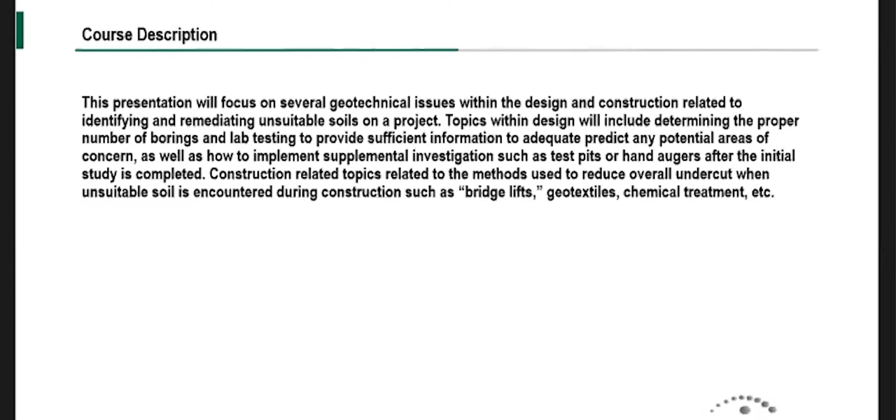The takeaways we'd like are to understand how the location and number of borings are determined in a study, how conducting additional site investigation techniques can reduce risk in soil remediation during construction, learn the causes of unsuitable subgrades and soils, how you can identify them, and how you can remedy them during construction. And then develop enough understanding so you can ask questions.

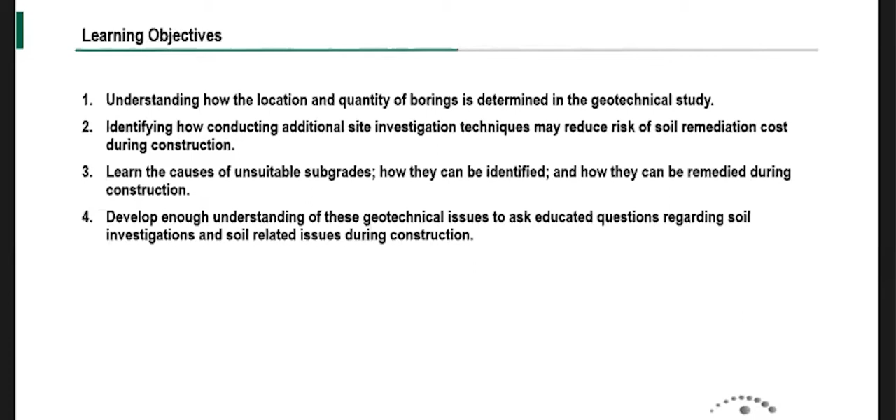That's the biggest thing - you're not going to walk away from this being an expert, but you will get some takeaways that hopefully, in the future, will trigger a memory of something you heard in this presentation, and you can ask a question that causes them to provide more information or an alternative.

So what's in a report? We talk about the subsurface exploration, the laboratory results, any analysis that's done, recommendations based on those analyses, and then the construction considerations. I always point to construction considerations and the geotechnical recommendations. The recommendations are basically based on what we've seen in the field - this is what we recommend, foundation-wise, retaining wall-wise, or pavement section-wise.

But the considerations take the recommendations a step further - these are items that may come up during construction that are probably going to cost the owner money, whether it's dewatering, unsuitable soils, the presence of rock higher than a bearing grade or excavation grade, things of that nature. Are you going to have issues environmentally? Is there a big trash pit on the site?

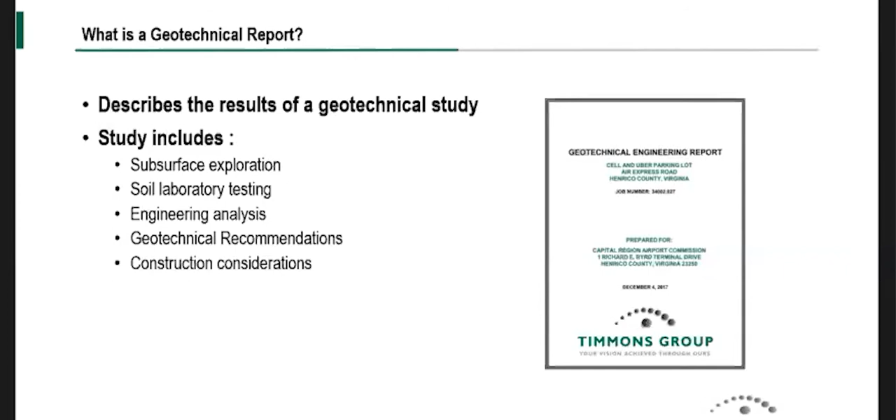So the subsurface exploration - basically we come in and get samples, and we'll get test borings done, sometimes test pits, and in some cases we'll do further testing with pressuremeter, CPT, DMT, depending on the type of foundations we think are going to be on a project. This helps us establish the properties of the soil. What we provide, I'll show you later, is basically like a graph, showing fill here, this type of soil here, this type of soil here, and that's where we draw our geotechnical recommendations from.

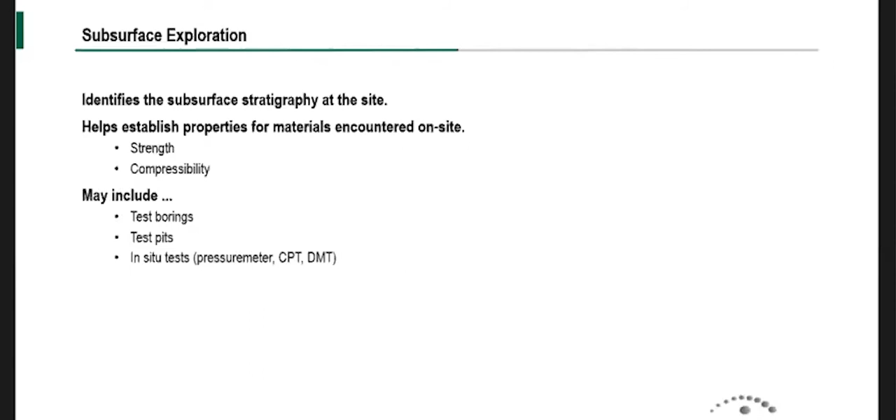So how we attain our borings in the soil samples is with the standard penetration test. This right here is either 18 inches or 2 feet long, and it's only 2 inches in inside diameter. So if we put 10 holes on a site, we're only getting 2 inches of soil sample within each one of those holes.

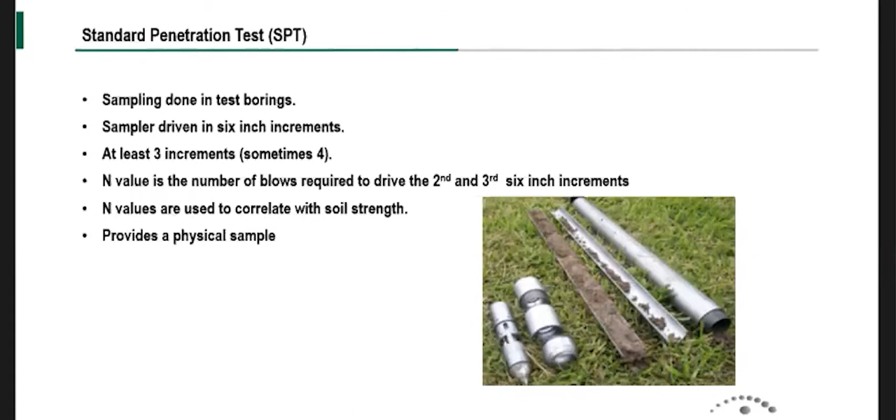So if your site is 100 by 100, you're really still not getting that much information from the samples. There can be a lot of variability, but this actual test is where we get our N values from, and we use the N values to correlate soil strength. And then we take the soil that's inside of the spoon and put it in jars, and that's where we get our samples from.

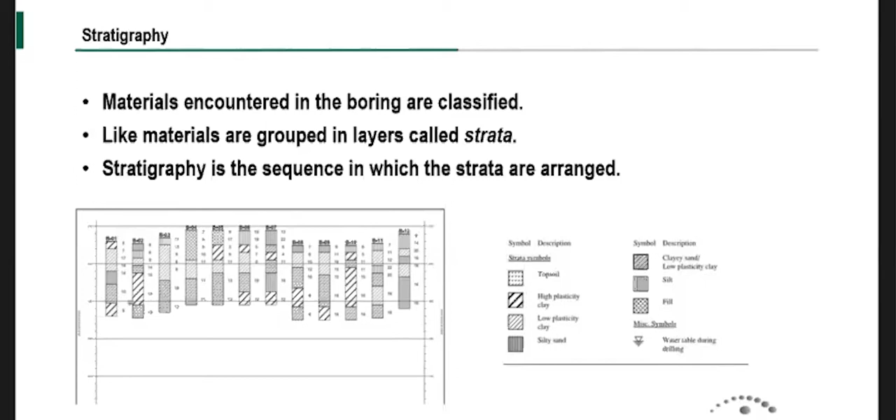The results of the test boring in the field are presented on a test boring log. There we classify the material and provide any lab data pertinent to that material. We list the depth and elevation where the materials are encountered. It also has their stratigraphy on there, the results of the SPT test, which is the N value associated with each type of material, and groundwater observation. So at 10 feet, you may see a little indicator saying groundwater was observed at 10 feet.

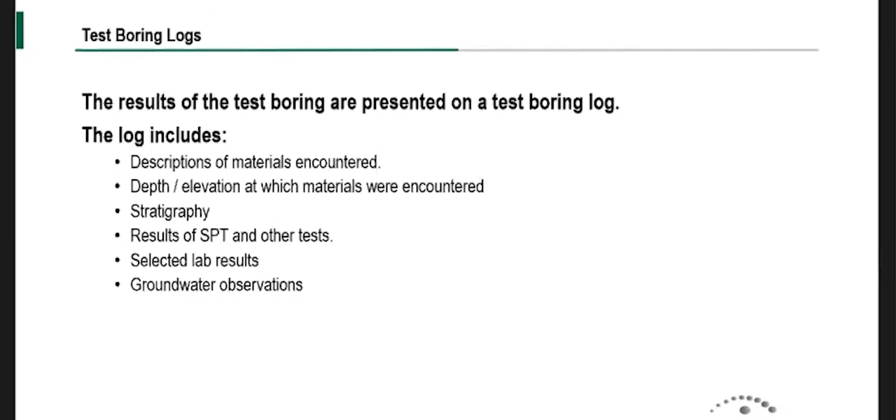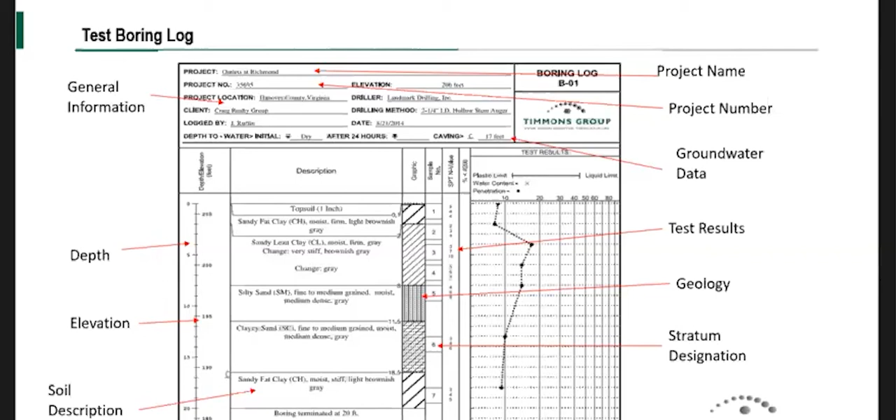You got the depth and elevation listed. The N values are right here, listed here. And then this is the test results, the liquid limit and plastic limit that we observed in the lab. And up here, we'll list any groundwater observations and anything like if it caves, which is pretty common.

So laboratory testing. Typical laboratory tests from boring: moisture content, gradation analysis, Atterberg limits. These are the things that we use to classify the soil that we get from the SPT test. Other tests that we perform: we'll get a bulk sample from the top 5 feet, and we can run a Proctor or CBR from that as well. But these are the bread and butter - these tests right here provide the bulk of the information for our engineering analysis and geotechnical recommendations later on.

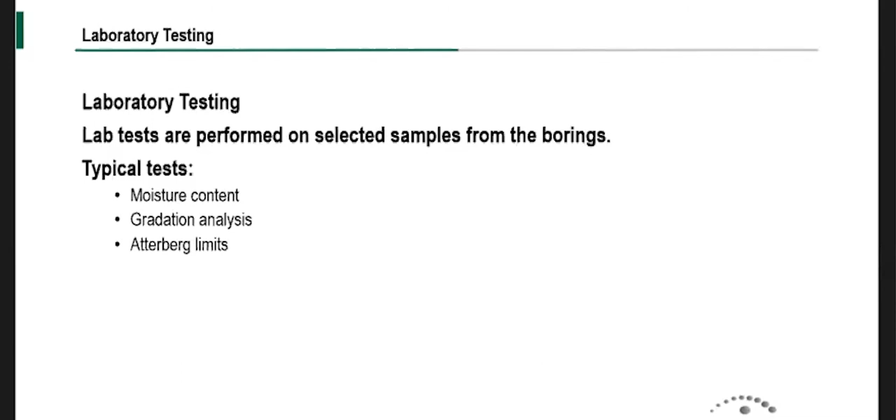So the components: the introduction, data collection and analysis. The introduction is what we understand the project to be. Data collection and analysis is how we approach the site, what we did on site to collect data, and what we plan on doing. The recommendation is based on the lab results and everything we get back, and that'll be where foundation recommendations are made, retaining wall, pavement.

Construction considerations are already discussed - these items are basically what's going to cost you money during construction. The limitations, we'll set limitations - we didn't drill this because of this, or we didn't do any environmental testing, that type of thing. And then the appendices is just where we put all the lab data and boring log, location plan, all that stuff goes in the appendix.

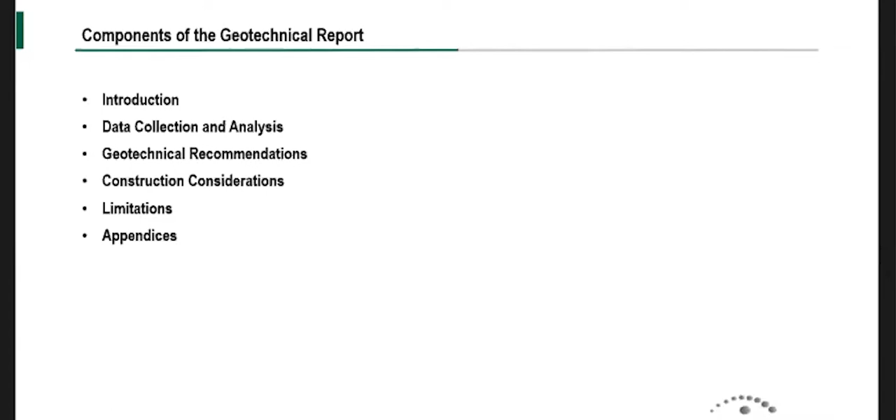So the introduction - to me, the biggest thing is, and I've seen this happen in industry, where this first section you're telling the owner, the architect, the designers that you understand what the project is and what they plan on doing on the site. So you may say it's a 5-acre site, the building will be in the northwest corner, it'll have a 90-space parking lot with an underground detention system within the parking lot.

And there's going to be a dumpster pad to the northwest and a new access road to the south. If you list all those things, then that's what you think the project is, and it's really a school addition, then did you do a bad job copy and pasting, or are you providing information for the wrong job? It doesn't happen that often, and normally it's just some copy and paste error, but when reviewing geotechnical reports from others, I have seen where they're talking about retail space, and it was for a community center. So obviously those are two separate things, and that needs to be clarified before you can really take anything further in the report at face value.

So the data collection: we described all the strata encountered, existing fill, the different fine and coarse grain soils, what their geological origins are, what the properties associated with those different strata are, whether this strata is probable for shrink swell, or an existing fill strata that has a lot of organics that may need to be removed or may decompose over time and be an issue. And also, where we observe groundwater and what impact that has on the project.

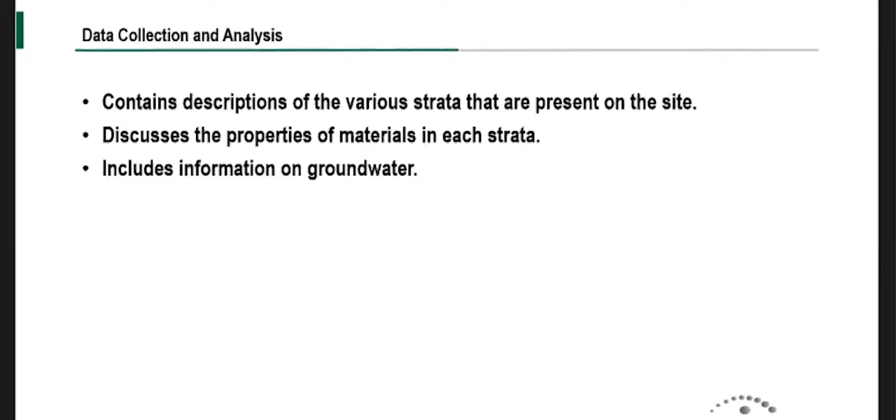The recommendations. So we've gone out to the site, we've drilled it, we've run all the labs, we've got our results back. Now it's time to provide the recommendations.

We're going to, in this section, talk about any recommendations for earthwork. A typical recommendation that all geotechnical engineers make, and it's not always followed, is all earthwork should be performed in the drier months. That doesn't always happen, depending on funding or timing or permitting or whatever. Project starts where it starts, but sometimes because this doesn't happen, the owner ends up paying more to get the earthwork done on a project, just because you're dealing with rain or cold weather or whatever.

We'll recommend a foundation type, whether it's shallow spread footings or some kind of deep foundation like piles or drilled shafts. Any below grade retaining walls for basements, and any pavement recommendations that are required will go in our recommendations section.

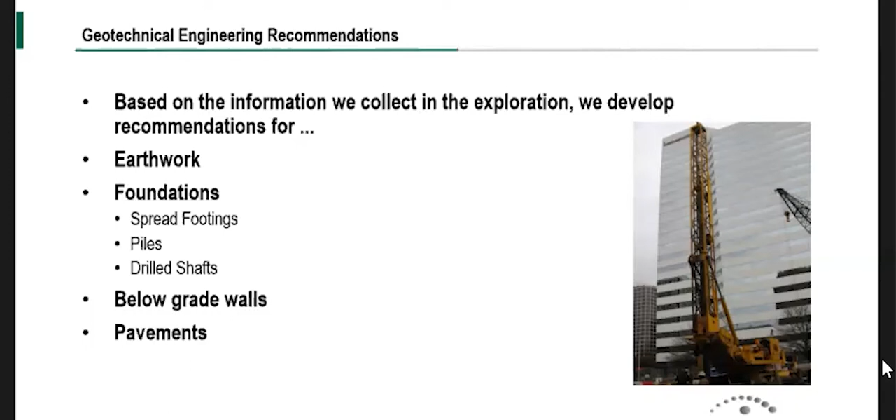So earthwork recommendations - this is where we talk about what needs to be done to prep the site for earthwork. How much topsoil we observed. What if there's a compacted fill that needs to be imported or excavated and placed on site. What the suitable materials are for that, how thick those materials shall be placed, and then any compaction requirements that are associated with the testing of the fill.

And then a moisture content requirement. Some projects have a very strict range. A lot of times you just see where you want the material to be able to achieve compaction. So you have a certain window based on the Proctor value that the moisture content needs to be.

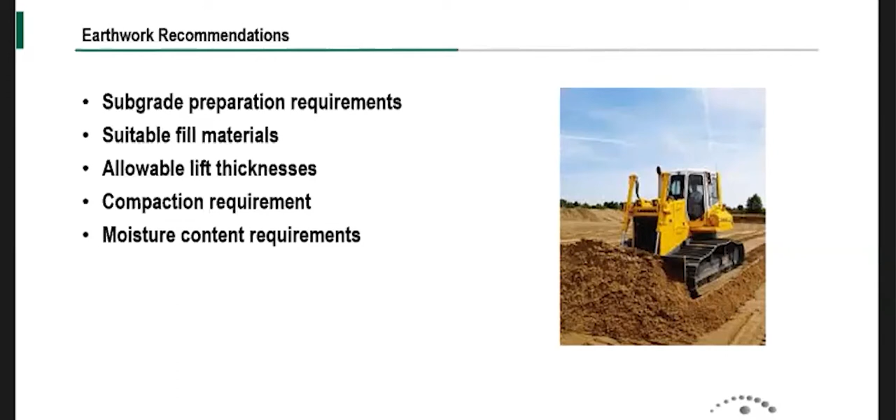Some of those soils may not be suitable. So in this section, we'll say the footing subgrades in the eastern portion of the building pad will be bearing on a high plastic material, and they need to be lowered an additional 2 feet. And that kind of goes into the next thing, which is the frost depth for the area. All footings should be below the frost depth.

And then any shrink swell issues that come from that - the change in moisture of the soil over time can destroy the concrete, and then everything settles. In this section, we'll talk about the expected differential settlement across the site based on the type of materials we observed, the lab testing results, and what the anticipated bearing strata will be for those foundations.

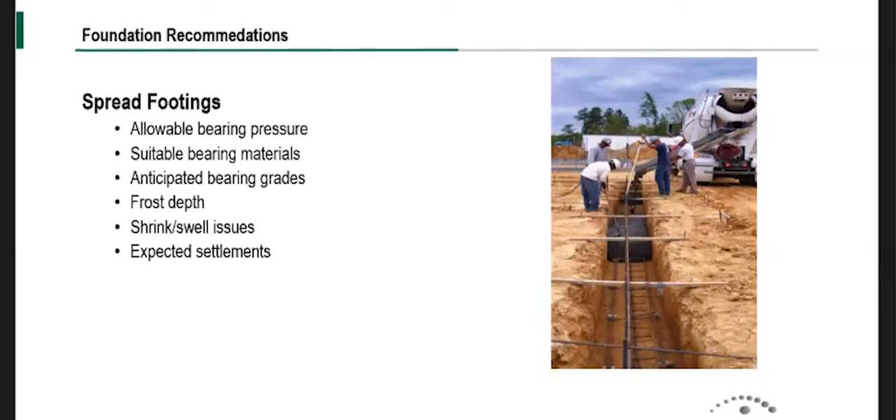If the spread footings are a no-go and we need to go to driven piles, we'll recommend a pile type and size. We'll also discuss the allowable capacity and what we anticipate the tip grades to be based on our data.

Any issues with installation - there may be a site with a bunch of existing fill, and you know that it's 10 feet of existing fill and you had trouble getting your borings done through that level. So you know there could be some issues with that. And depending on the type of pile you're driving, obstructions can be a huge hindrance to getting the pile installed properly. So you may say, we recommend that the contractor pre-drill all holes at pile locations to a depth of 10 feet below subgrade. That way you're just augering through what you think the junk is.

Any testing requirements - all piles have to be tested for their capacity, what the anticipated capacity is calculated to be. The most common method for that is dynamic pile testing, which is PDA. It's more widely accepted now. It used to be an either/or type thing - it was a big deal to recommend PDA testing in the geotech report. It's pretty much commonplace now.

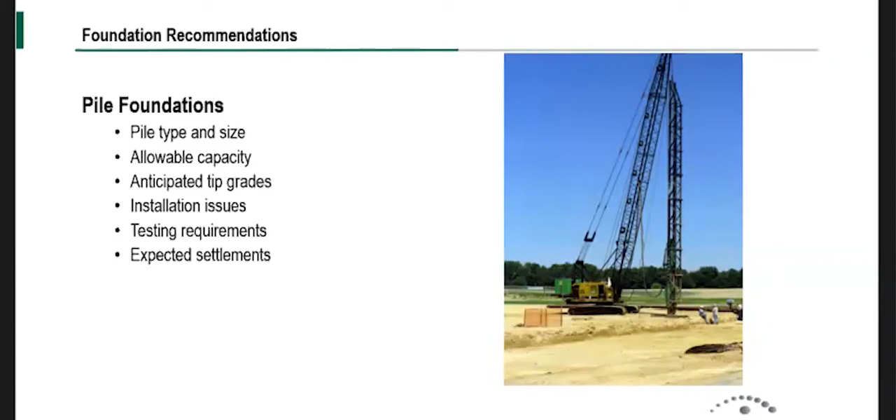And then once again, any expected settlements - just because you're putting a building or parking garage or something on piles, you're still going to have differential settlement across the site. Drill shafts are the same way.

The type and the size, what the anticipated bearing material is, whether it's a type of soil, we're looking for maybe a particular geologic formation to bear these in, or we're going to rock, and we'll discuss what competent rock is here.

The bearing pressures associated with those bearing materials, and any shaft friction. Some piles have friction in the calculation, so we'll talk about that. And then once again, the bearing grades, where we're thinking it's going to be, and any installation issues.

With drill shafts, groundwater can be a huge problem. If you observe groundwater pretty high, the installer is going to anticipate the use of a slurry mix or something to get the concrete in for the drill shaft. That's an additional cost. If that's mentioned ahead of time, it would be included in their bid price.

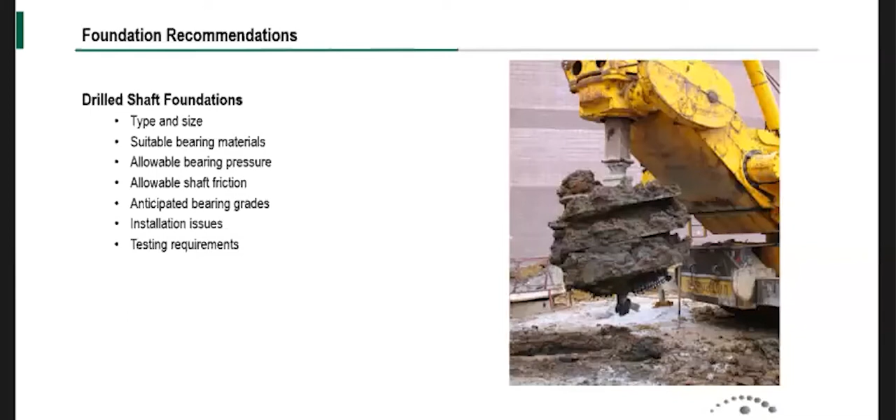If it's neglected during the geotech report, or the designer does not pick up on it, then it may not be a requirement in the bid package, and then they'll come back and say, hey, this is additional work, we need more money.

Like I said, construction considerations. So we've got all this stuff that we've analyzed and reported on, and the information is, this is what we think you need to do to properly support everything that's going on the site. However, your site has X, Y, and Z, and you need to take these things into consideration so that you can do what you're planning on doing.

Whether that's, maybe in the parking lot area, there's copious amounts of topsoil, and you don't want the topsoil right under your parking lot or right under your entrance road. So that's going to require some additional excavation by the earthwork contractor.

This allows them the opportunity to come up with some kind of preventative method, whether they just term the site an at-risk site, and the earthwork contractor is responsible for everything below the subgrade. They're going to price it as such, or maybe you have some contingency built into the bids, and you'll ask for an allowance for undercut.

You may say, we anticipate 10,000 yards of undercut on this site. What's your price per cubic yard? And that becomes a way that the bids are analyzed.

Typically, when they're bidding undercut, the price is going to be cheaper than when they already have the job and they're on site and mobilized. So bidding undercut, they may find a cheaper supply to get the proper material. They're going to take a little bit of a hit on the labor costs. Before construction, it may be $35 to $40 a yard to undercut and replace, and during construction, it might be $55 a yard.

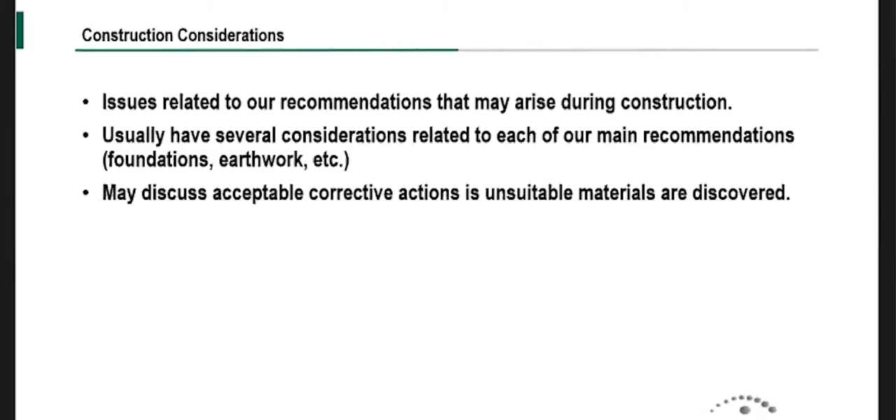So how do we decide the quantity, depths, and locations of borings? Sometimes we get a phone call and the owner insists that they only want 5 borings on their site, and this is how deep they want them, and they've done hundreds of these projects so they know — sometimes they're right, sometimes they're wrong.

A lot of times we just like to say, let us decide how many borings, and we'll cover the site as best as possible. A good rule of thumb is 1 boring every 200 feet. If you have experience in the area and anticipate high variability, you may drop that to 1 every 100 or 1 every 50. It just depends on your knowledge of the location and what you think is below the ground surface.

I put this equation in there just because it was something I picked up on in college, and I've never used it, but it's 10 times the number of stories to the 7/10th power. Footing depth is the boring depth calculation, but that's not typically determined.

The big thing is that when you call somebody, whether it's us or somebody else, you call them to just discuss the project in general with information. Maybe you have some loads, maybe you don't, and then let them plot out how they're going to attack the subsurface exploration. That's the biggest takeaway from this — let the professional do what they need to do.

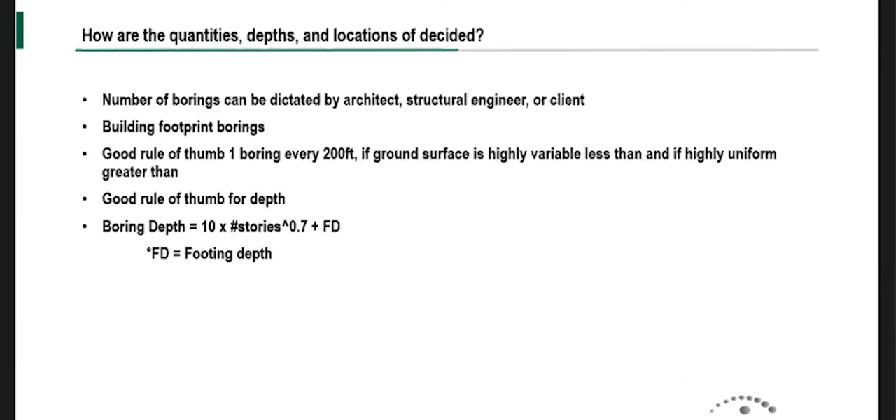Non-building borings are typically dictated by an asphalt section, the amount of fill, and whether you have some E&S stuff on site that needs information.

Pavement borings, you always want to go to the deepest utility just to make sure that you have enough information to know that you're not going to have any issues with your utilities settling, being founded on extremely soft soils, or that groundwater or rock won't be an issue to get your utilities installed.

Similar spacing as the buildings, one every 200 feet, unless you have previous knowledge of some conditions. Any permanent BMPs or underground retention systems, you're going to want information on. Large fill areas, you're going to want some information on, and also large cut areas.

We'll do borings on cut areas so that you can get the information and know what you're digging out to place over here. Typically we'll run a couple proctors on those borings as well, so that you already have information related to what the in-place moisture is of that material, and you'll have a proctor value of that material. So when it's time to place it, you're not waiting on lab results.

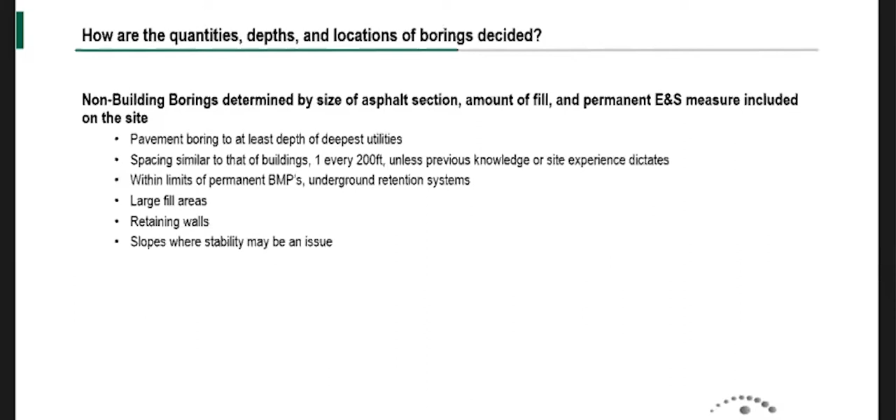Then also any retaining walls that are on site, they have foundations that need to be supported by soil. And then any slope stabilities where slope may be an issue, your building is going to be next to a slope, you'll want to do a slope analysis on that.

When additional recommendations or site investigation are recommended, so we've done everything, we've written our report, and within the construction considerations, or maybe even the recommendations, we'll say, hey, we found X, and to limit your exposure, there may be environmental concerns.

Maybe a boring had the smell of petroleum, or maybe you saw trash or a bunch of organic material in a boring at a depth that's going to be a hindrance to what's going on that part of the site. Or maybe you had some obstructions and you couldn't get this boring done because you had obstructions on site.

You'll want to incorporate this information in the report so that the owner has more information. But like I said, we only have the 2-inch diameter sample, so we need to see more so that we can kind of identify these areas and come up with a contingency for the owner so that they have an idea of what these additional costs are going to be up front.

Also, if anything on the site changes from when the geotech is given a site layout plan and they determine this is where everything is going to be, to when the plans are sent out for bid, if anything changes, please, I implore you to just circle back to the geotech and make sure that everything's fine.

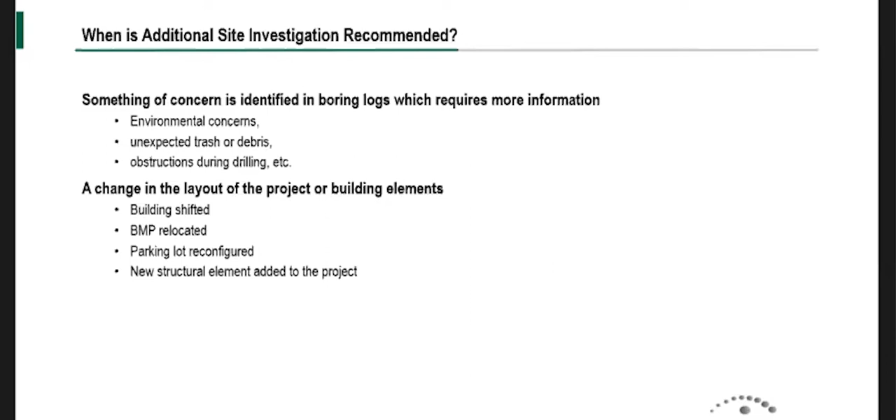and putting open graded stone under them so they had a suitable subgrade to bear on. So that was two things on one project where a simple email would have invoked a discussion to say, hey, if you're going to do this, then you're going to have to think about these things, and what are the costs going to be? They may not have decided to flip the building, or maybe they would have done something differently with the money. I don't know. But that's one of those things - if something changes on a site, you definitely want to let the geotechnical engineer at least take a look at what's being changed, and they may have some real concerns.

So you determine you need additional site investigation. Well, what do you do? We can always do more borings. Hand augers are just a person doing the boring instead of a mechanical auger. Test pits are also effective - you get a big excavator out there and dig some holes in the ground.

Or maybe you need to do more lab testing. Maybe you need to do some environmental testing because, like I said, you've found some petroleum smelling material and you're trying to find the limits of that material so you can do what you need to submit to the state. And then infiltration testing - do you have to have a wet pond somewhere, and you've got sand at the bottom of it, then it's not going to hold water, or vice versa, right? You need that. That's additional testing that's not always thought of at the time of site layout and may come up later.

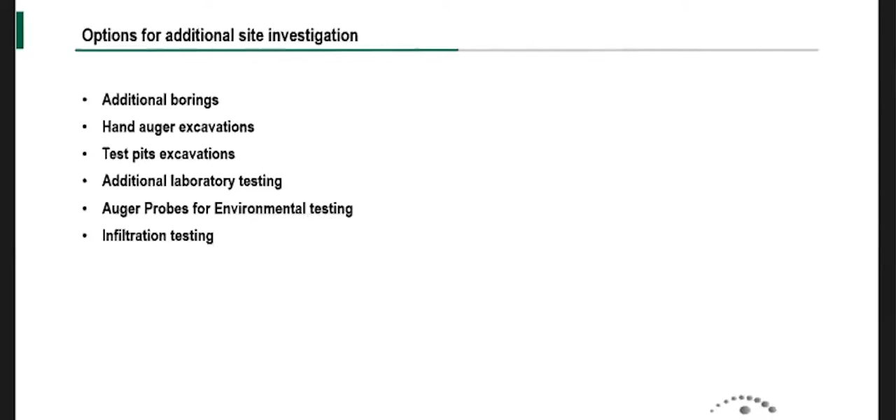So the benefits, like I said, you get more information. It helps you help the owner determine another item for them to budget and get a bid on - a competitive bid versus we've already awarded a contract and the contractor just says, this is what it costs for us to do this. You can isolate areas of concern, establish limits ahead of time.

And it also allows you to kind of re-engineer - well, maybe it's not the best to put the building right here because of these concerns. If we can put it on the other side of the site, how does that affect everything? It's something to be evaluated at that time, when it's a lot cheaper just to pay a consultant, a designer, to redraw some plans than it is to pay a contractor to haul off 30,000 yards of material.

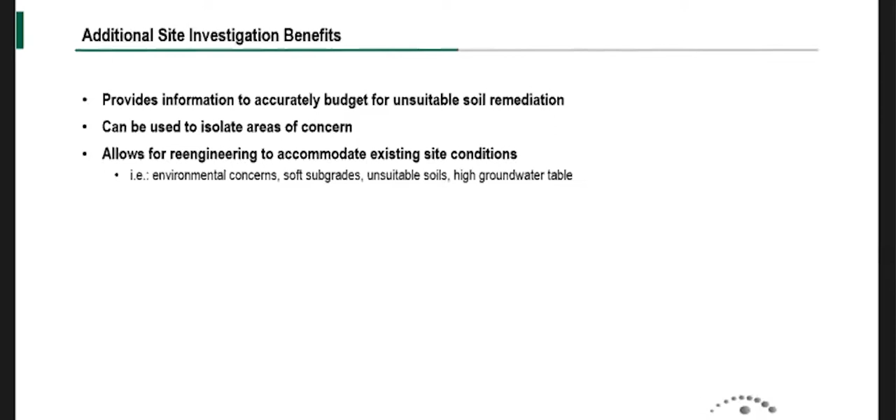So how do you identify unsuitable soils during construction? Proof roll is the tried and true method. You either use a tandem axle dump truck, which isn't always available, or you may have suspicions that the material won't support a street truck driving over it. So you can allow them to use a pan or some kind of heavy off-road equipment - motor grader, off-road dumper - are typically what you want to see.

Sometimes they only have a roller on site. That's a little more - I don't know, you probably don't want to use a roller, but I've definitely used a roller in my career because that was the only thing available. You're just more conservative when observing that. But that's what you do - you come on site and you proof roll.

The contractor says, I stripped all the topsoil off, I'm ready to start earthwork. So you come out there and you proof roll what they've done to make sure that the subgrade is able to support whatever is going in the area.

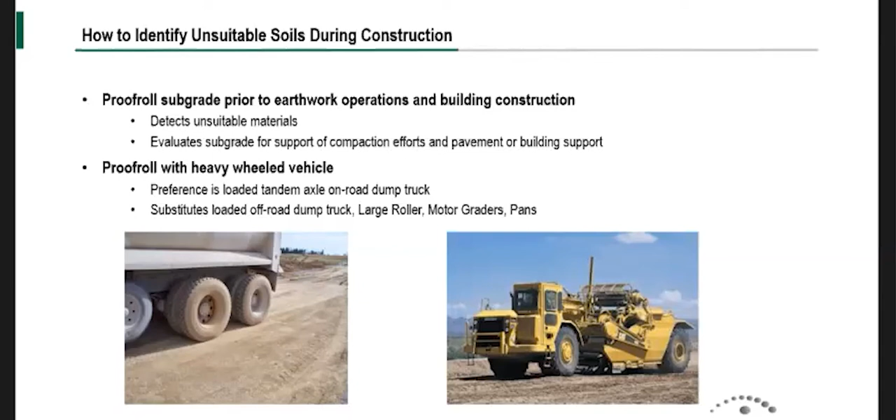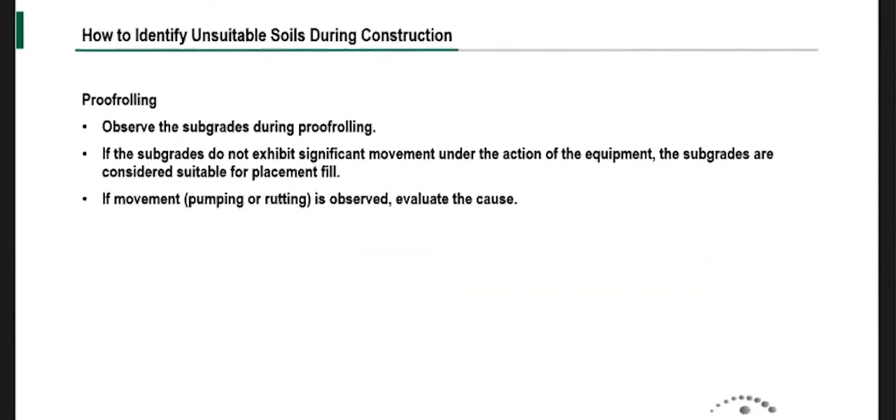So like I said, if the subgrades don't exhibit significant movement, then the subgrades are good. If you get movement, which is pumping or rutting, then you need to do a little bit more work to evaluate the cause. So pumping is like a wave-like action - you kind of think of this under the tire as the tire goes by.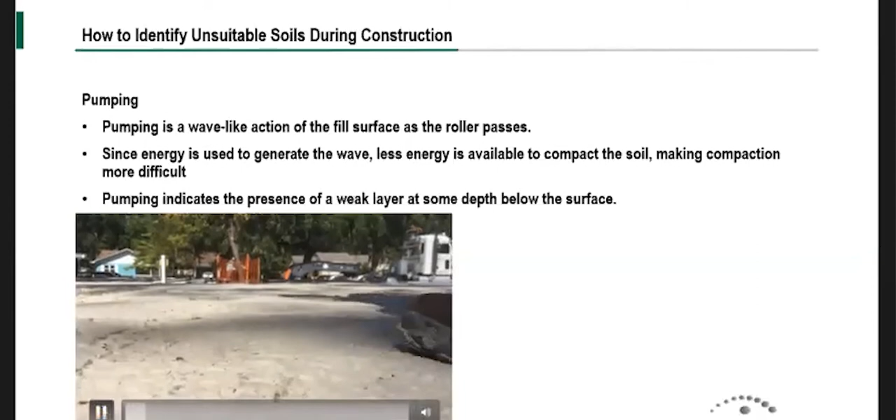And this is a good video that shows pumping. So this is a job site - it's pretty sandy material, and it rained the night before. You can see the earthwork contractor wanted to put another lift of fill on there, and we recommended not to. They said, no, it's fine, it looks dry. And then we get out there, and this is what it looks like. See how spongy that is? That's probably the best definition of pumping I can provide.

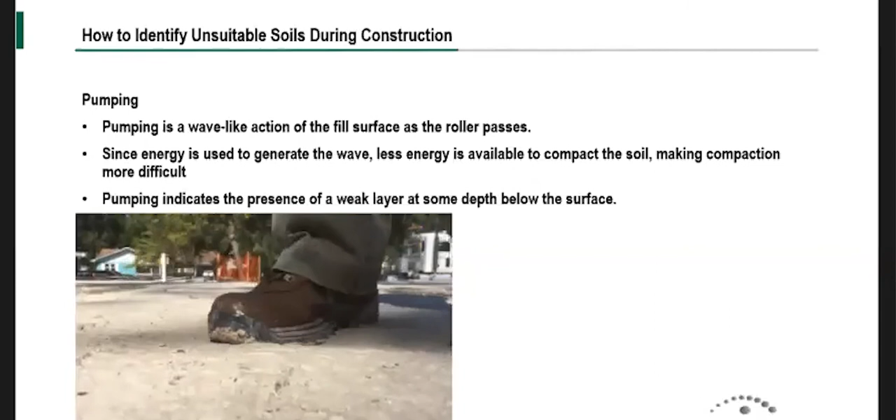This is what rutting is. Basically the surface of the material is not strong enough to support the load, so it just sinks and gives in. A lot of times you get pumping and rutting as a combination.

Pumping shows that you have some kind of issue below what you can see. Rutting's telling you that at least the surface is weak. When you have them both, that means the top layer is weak and you have some issue going on below what you can see.

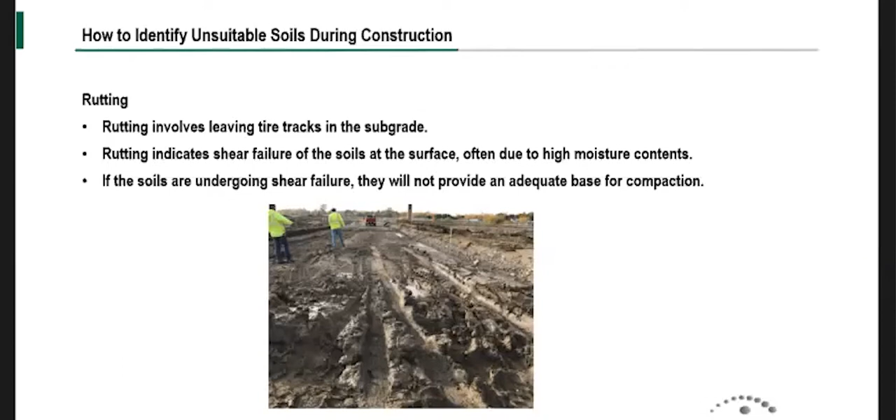Typically we'll dig a test pit, and it's normally pretty clear why. Sometimes you may not be able to do a test pit, and we'll have to do some hand augers in that area.

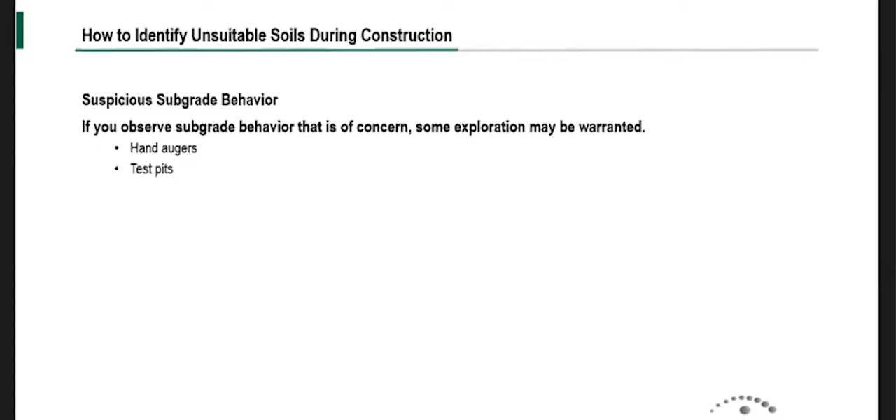Other things to look for during construction to help you identify possible unsuitable material: any seepage. If you got water coming in from somewhere that you don't anticipate, that's always an issue. Existing utilities - most of the time when utilities are installed, nobody's monitoring them, especially if it's not going under a known structure and it's going through a green area or next to a road. Typically the material's just thrown back in there.

If you encounter any existing foundations or evidence of mining activity, that can lead to issues. If it's existing foundations, there was probably a building that was demolished, and they may or may not have cleared out all the construction debris, or they may have just demoed it into itself, and then you're finding some kind of part of the building that's remaining.

Here in Virginia, Henrico County, they built a school in the West End, and they were probably 85% done with the project. In that area, there were known areas of exploratory coal mine shafts. Prior to this school being built, we identified two during the phase 1 ESA on the complete opposite end of the site, but nothing on this side of the site and nothing else around it.

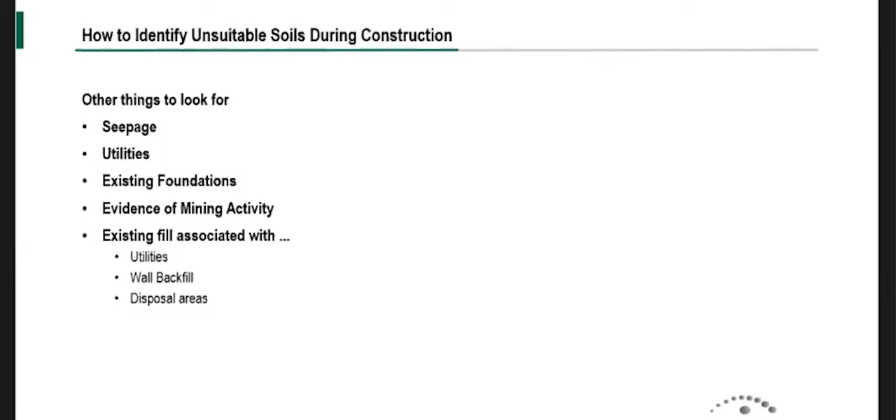They ended up putting foam in to raise the elevation of the field, and they haven't had any issues since, but it was baffling initially to show up on a job site and see a huge depression formed when everything seemed fine prior to that. We didn't have any issues with any of the soil around the track, the stands, the concession stand, the ticket booth - nothing. Everything was fine. I guess it was enough traffic over it with laying the sod and installing the sprinklers that it decided to settle. I don't know, it was weird, but that happens.

So corrective actions to pumping and rutting: you can improve the soils in place, you can remove the unsuitable soils, you can use some kind of geotextile or implement a bridge lift, or depending on what it is, maybe just create a working platform.

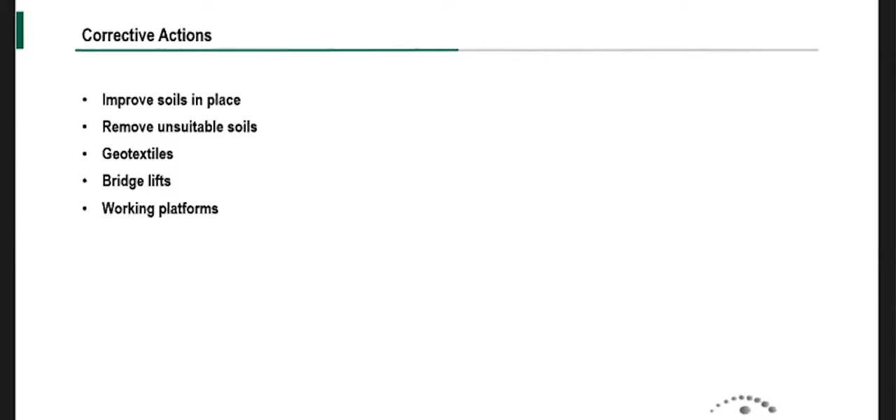So when you have a weak subgrade, sometimes you can just recompact it. If we did a proof roll and all we observed was rutting, we'll just tell the contractor, hey, blade this off and bring your roller in and re-roll it.

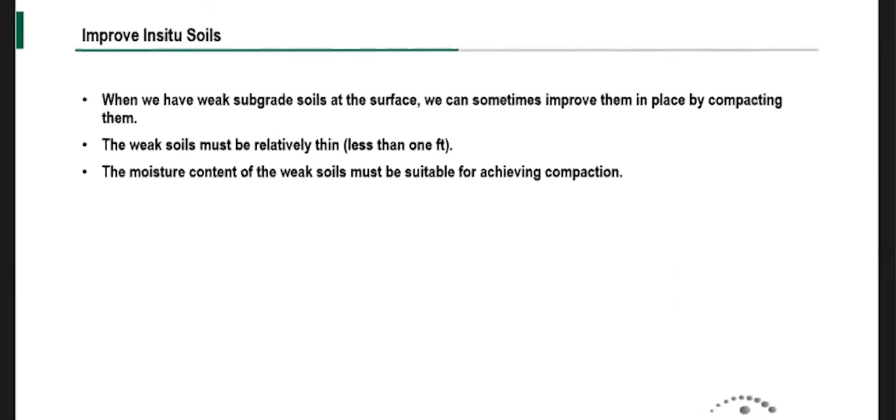Just roll it again till it becomes suitable. Normally that's only up to about a foot or so that you can do that, and the moisture content must be sufficient to achieve proper compaction. It can't be too dry, it can't be too wet.

We can also use lime or cement to treat the in situ soil on top, to dry it back and recompact it. This is normally when it's too wet. These are typically implemented in the winter months when you don't have an opportunity to dry the soil, because the sun's not out, it's not hot enough, and you probably don't have the time—you're dealing with weather, so just letting it dry isn't feasible due to the schedule. So you'll treat it with lime or cement, and it basically dries it out. It changes the properties of the soil some, and you have to run some additional lab testing, but you can save a lot of time and/or money.

It may be a large area, and to undercut it might be $25 a yard. To lime or cement treat it might be $9 a yard. So you get a good product and you save the owner money by doing that.

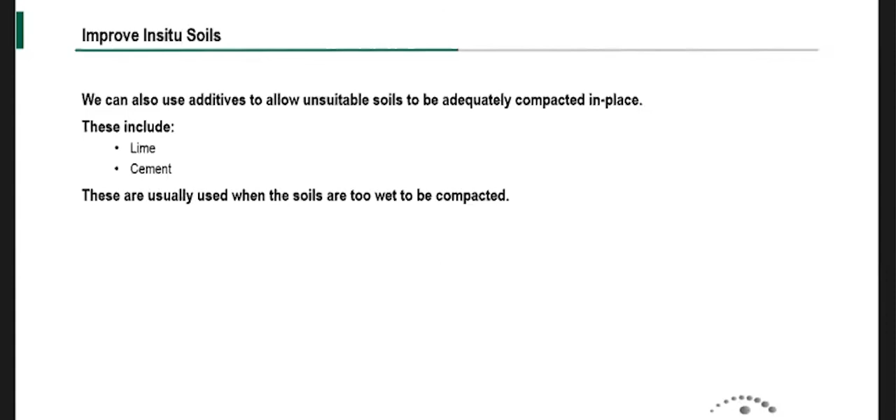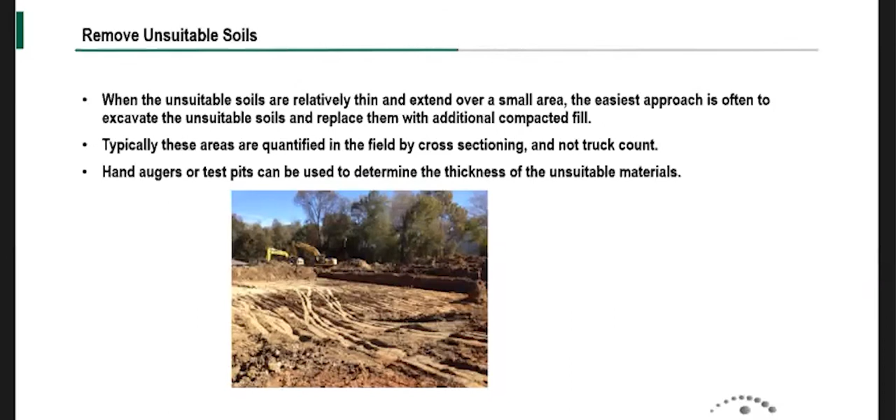Another option is a bridge lift. It's used in areas of deep fills for non-building areas—you don't want to put a bridge lift under a building. Basically you're putting a thicker than normal lift down to kind of bridge over some weaker subgrade areas. If the whole area is weak, a bridge lift probably isn't going to work, but if you have some decent areas and some weaker areas, you can spread a thick lift over it and roll it in, distancing the load from the weaker area.

That's probably the best way to explain it—you've got two areas that are decent and a weak area in the middle, so you just come in. A typical lift of fill is a maximum of a foot; you'd like to see the contractor place it in maybe 10-inch lifts or so. A bridge lift is 1.5 to 2 feet. I've seen 3-foot bridge lifts used before, depending on how bad it was and what we were doing.

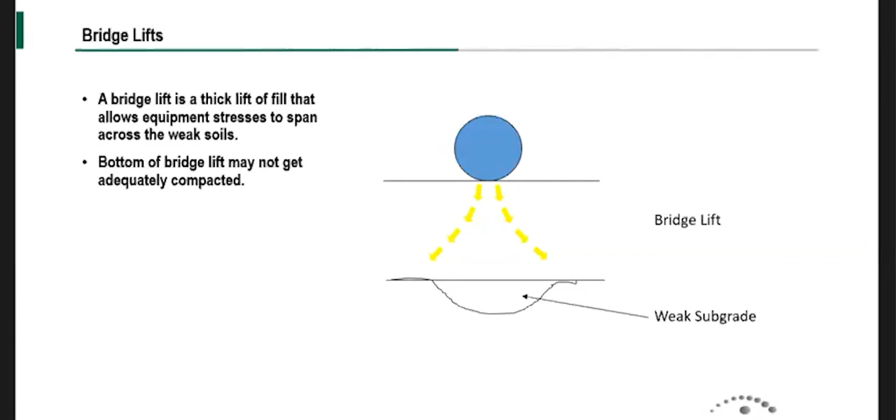But when you place a bridge lift, you don't want the bridge lift material to be questionable material. You want a good moisture content, a good type of material. You wouldn't want to use a highly plastic, fine grain material with a high moisture content for a bridge lift, because typically that's the type of material you're bridging over—you wouldn't want to put the same type of material in place. You're going to want to use something more coarse, something sandy, maybe a rock screening or a 21 stone in that instance.

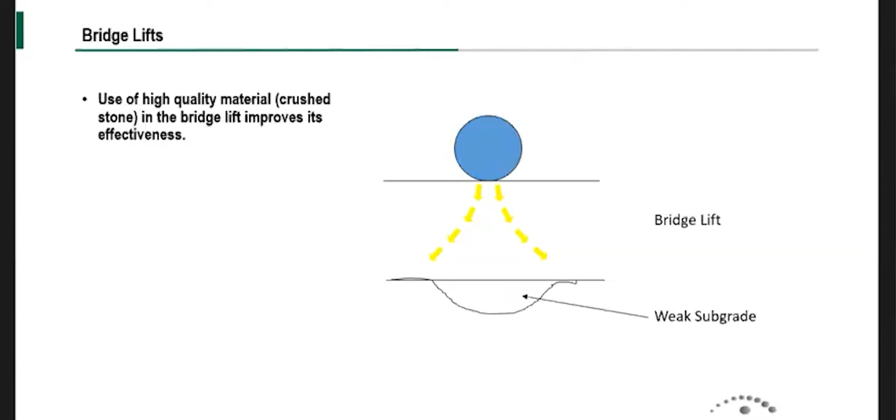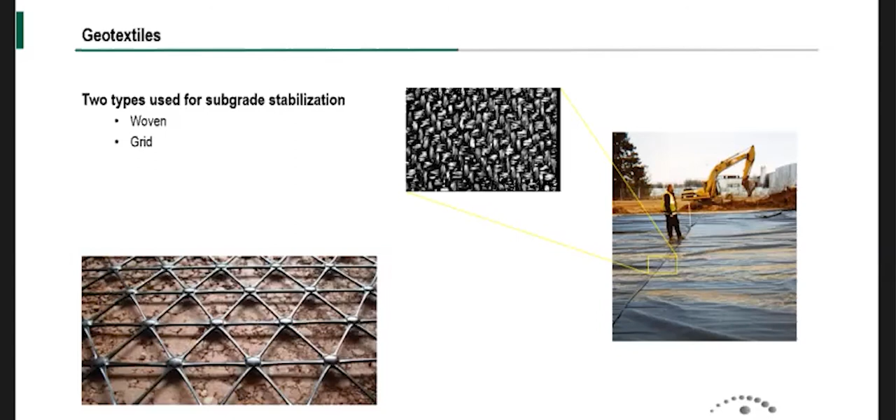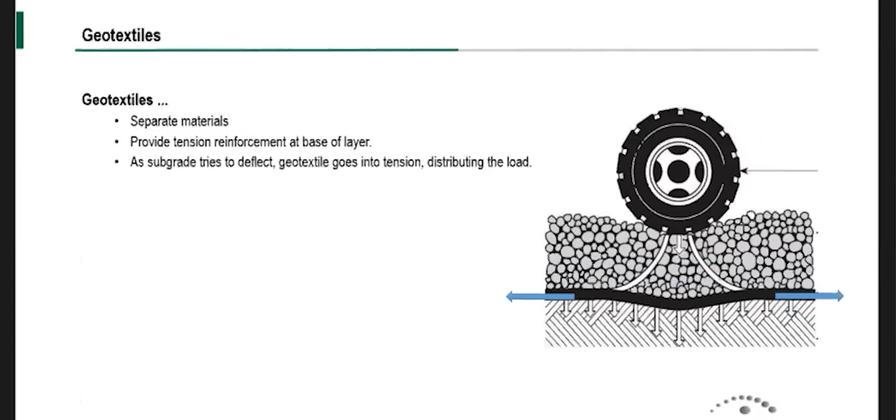You can also implement geotextiles. You can have a fabric like this, or geogrid. Geogrid works best with stone—it allows the pieces of stone to lock into the openings, and fabric is also a good bridging tool. So this is how geotextiles work: you've got the geotextile, and the load from your vehicle goes through the stone, so instead of hitting directly in that area, it spreads across the geotextile before the load transitions to the soil subgrade. This helps reduce the actual load the subgrade sees, and in essence strengthens the subgrade. Geogrid works the exact same way.

A working platform—you typically see this in like a utility, maybe where you have groundwater issues or a very soft soil that doesn't seem to end.

Like out at the Richmond airport, you have about 3.5 feet of existing fill and natural material that's decent, and then below that you have a very nasty fat clay material. So a lot of times if the utilities are going to be any deeper than that, the civil designers out there will go with a thicker than normal stone bedding just to make it part of the contract.

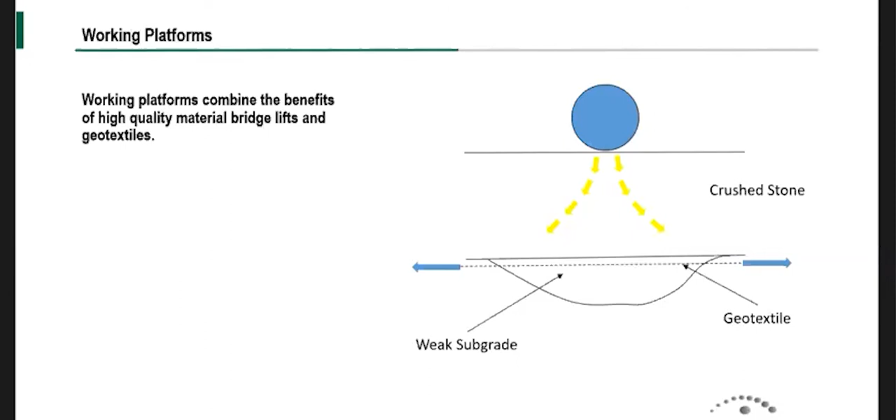Because you know that you're going to need that additional stone so that the pipe won't settle. But this is what that is illustrating. So you have a weak subgrade. You could use a geotextile if you want, or sometimes you just come in with a bunch of crushed stone. Just depends on the situation.

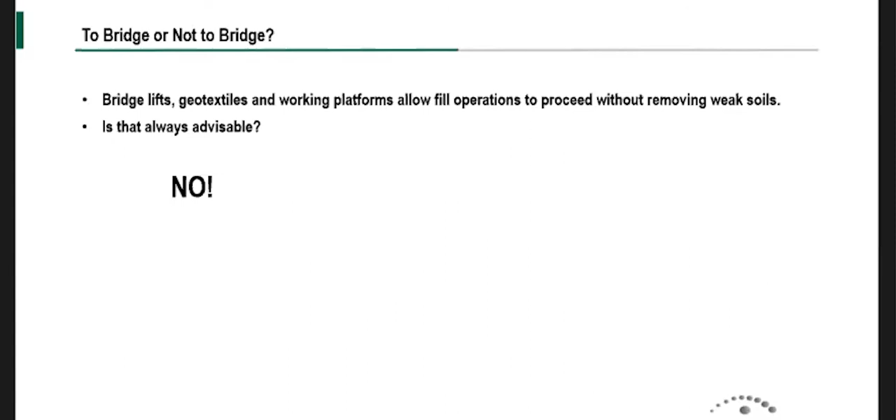To bridge or not to bridge, like I said, bridge lifts, geotextiles, working platforms are great to help move along earthwork operations. Is it advisable to always use them? No. If you have materials that are weaker, that you think are going to be unsuitable, you want to remove them within a building, or extend the foundation below that elevation, because in those areas you're going to have a constant load on that material. And so bridge lifts and stuff work best on pavement areas, parking lots, things where it's not a constant static load sitting on it - it's a dynamic load, like a car or a dump truck, something driving over it. So this is just indicating this.

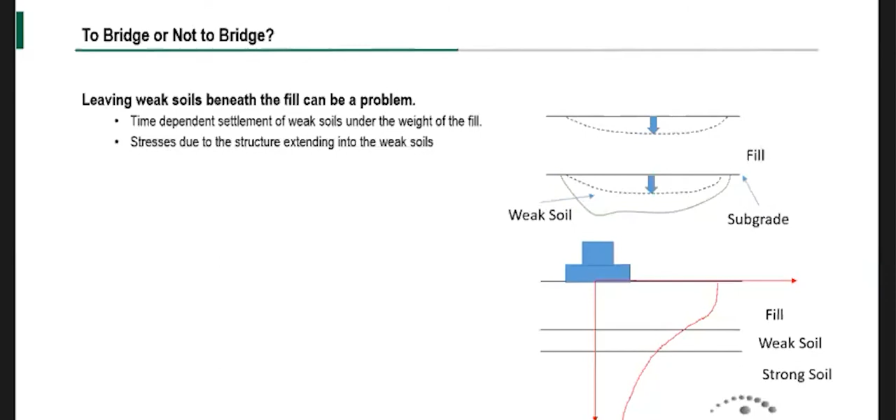And with that, any questions?